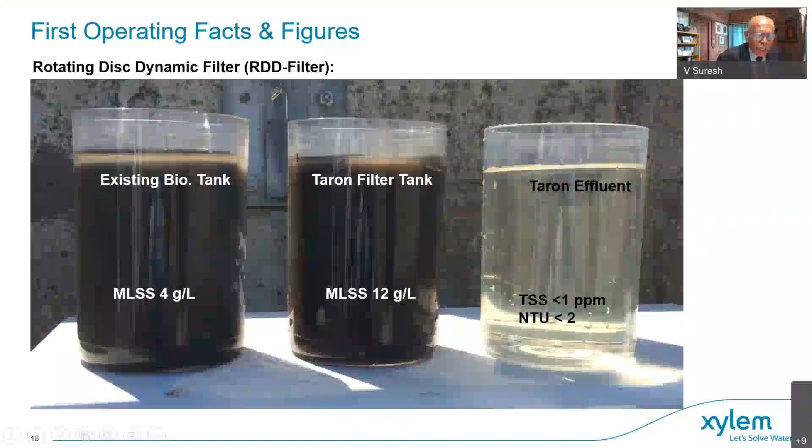Mayor Garg, Head Infrastructure Service of Rudrabhishek Enterprises Limited, is trying to talk about using refuse-derived fuel or biomass pellets for power generation. Could I ask Garg sir to kindly make his interesting presentation on how to use all the waste material as an important fuel, RDF component. Sir, please go ahead.

Yeah, but try to make it in 7 minutes, not more. Sir, yeah, we'll have some time.

Good afternoon to all distinguished panelists and Suresh sir. Let me share my screen. I hope it is visible to everyone. Not so far, it'll come once you open it. It's coming now, opening now. Now it's come, sir. Yeah, sir, very visible, very visible.

I am Mayor Kumar Garg, Head Infrastructure Services. Joined REPL about a month back. On the topic of use of biomass pellets for electricity generation, I am thankful to Professor S.K. Tyagi of the Department of Science and Energy Studies at IIT Delhi, who initiated me into this, and this is how the interest developed.

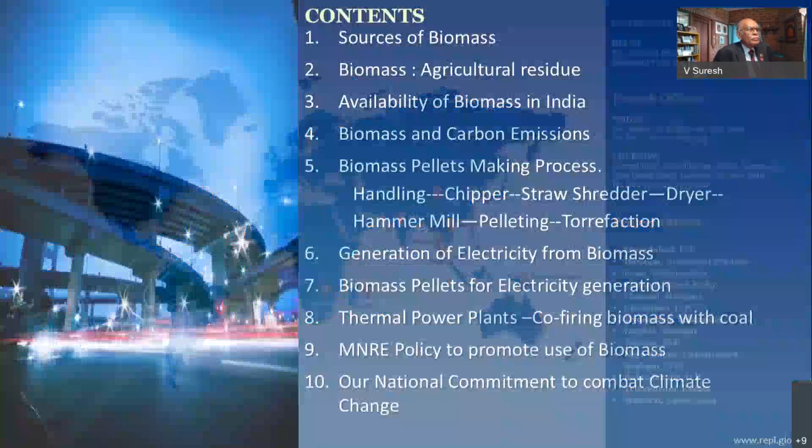Yes, sir. So I'm going to cover the sources. I think I'll straight away start. Yeah, you should better go ahead.

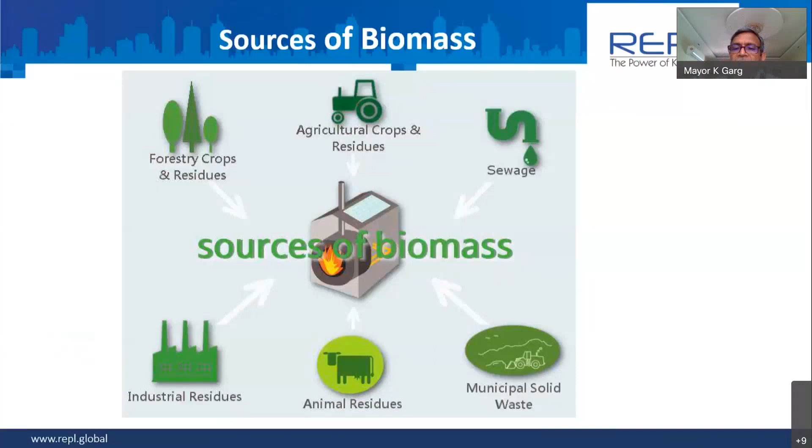We all know that the sources of biomass are forestry crops. We get it from agriculture residue available from the field after harvesting, maybe from sewage treatment plants as dried sludge, from municipal solid waste, from animal residues, and also from various industries. These are some of the agriculture residues generally used for making biomass pellets: wood chips, sawdust, off cuts. You can see all this on the screen.

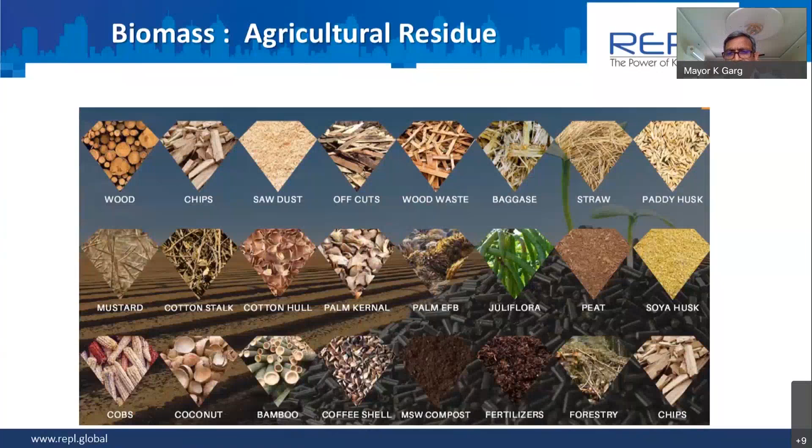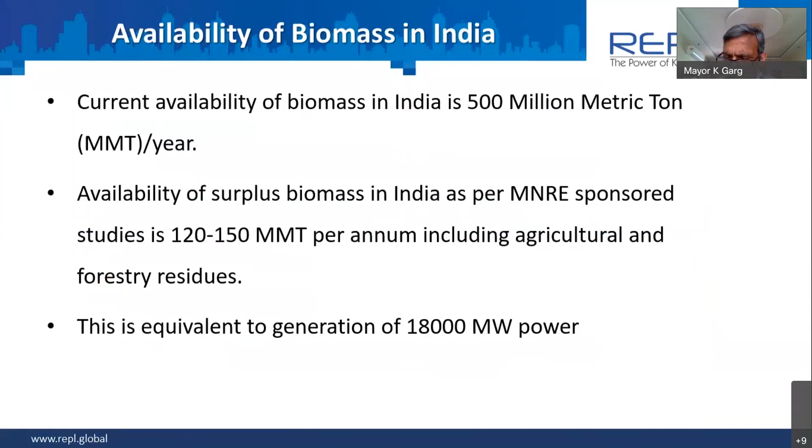Now, the current availability of biomass in India is around 500 million metric tons. As per MNRE studies, it is around 120 to 150 million metric tons per annum, which includes agricultural and forestry residues, equivalent to generation of around 18,000 megawatts of power.

Why is this important? Biomass is generated from plants, from leaves or roots, and when they are alive, they absorb carbon dioxide through photosynthesis. When it is converted into biomass pellets and we burn it, the carbon dioxide goes back into the atmosphere, so in a way it's a carbon neutral fuel. Even after considering the energy used in transportation, collection, processing, and making of the biomass pellet, it is significantly lower than coal firing, which makes it a greener alternative.

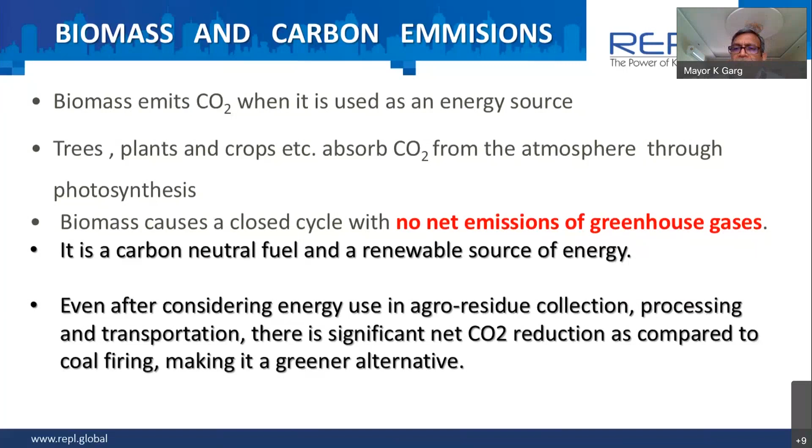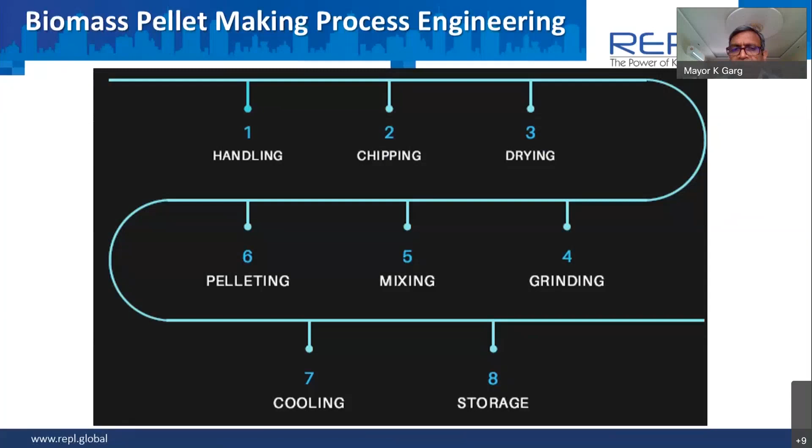This is how we make biomass pellets. First, the biomass raw material is collected and brought to the pellet making mill. Chipping is done, then drying, grinding, mixing, pelleting, cooling, and storage. I'll explain in the further slides.

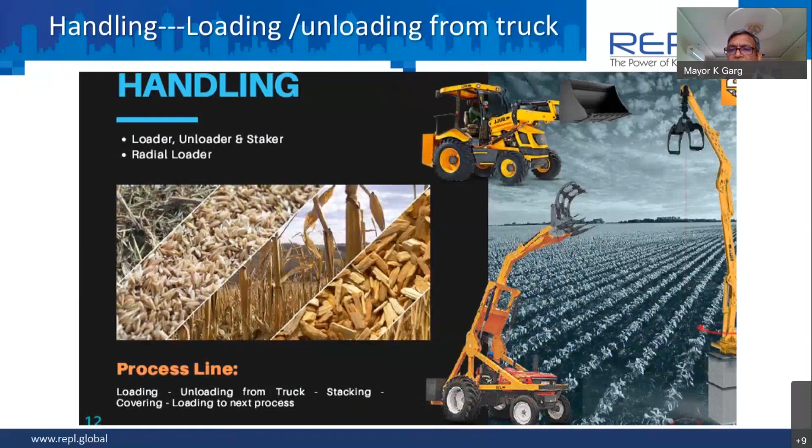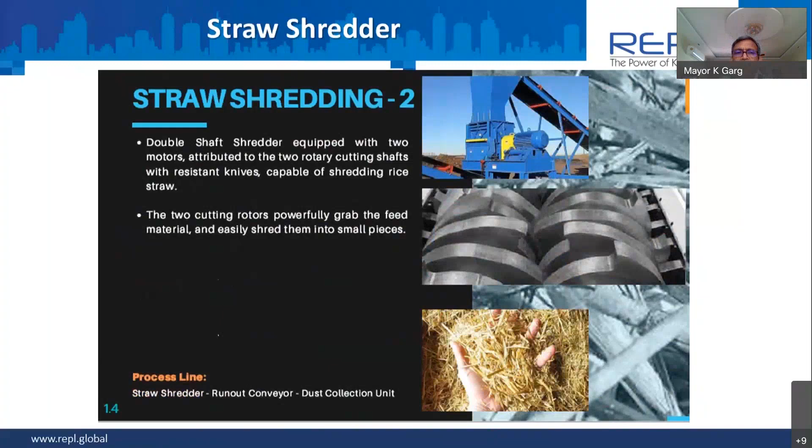Basically you bring the agriculture residue from the fields to the pellet making mill, then you chip it to make it smaller sizes. If straw is there, a particular shredder makes it smaller still. Then the chips are dried, since moisture content shouldn't be more than 10 to 12% — more moisture causes problems in pellet making. Ultimately, you churn everything down to the smallest particle and force it through a die to get the pellets, generally 20 to 35 mm in diameter and similar length.

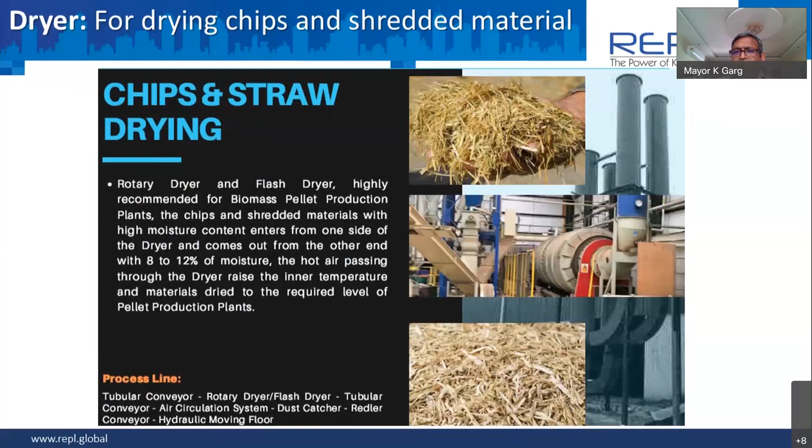This is what you're trying to achieve, which can happen only when the moisture content is less than 10 to 12%. So what you see here at the bottom of the screen, these are the pellets.

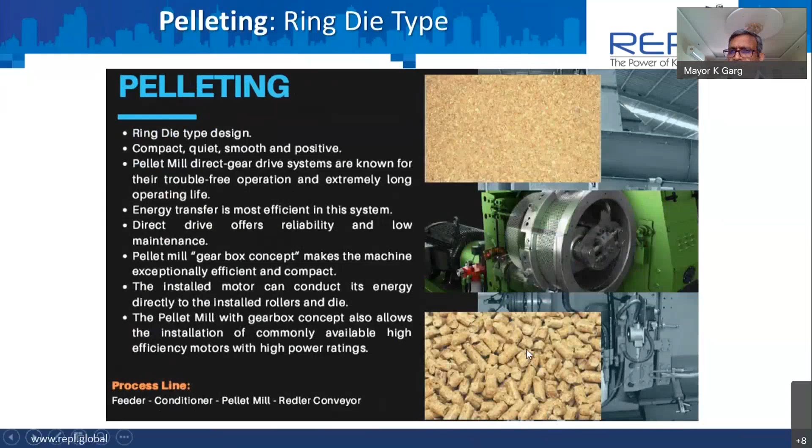And torrefaction, why do we do torrefaction? Torrefaction is nothing but slowly heating biomass pellets to 300 degrees Celsius to improve their energy content and also the finish. What you get in return is a very solid, uniform product, which retains 70% of the total weight. The energy content also comes down, but it is very low in moisture content.

These are generally preferred by NTPC. Lately, NTPC has started co-firing coal along with biomass pellets, to the extent of 5 to 7%, so these biomass pellets need to have a particular quality in terms of percentage fines, raw material used, moisture content, and gross calorific value.

So both torrefied and non-torrefied biomass pellets can be used. All over the country, around 13 NTPC plants have been retrofitted to make use of biomass pellets.

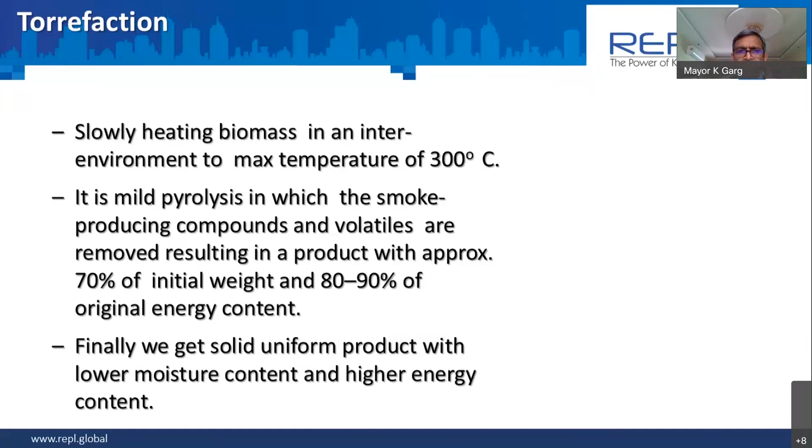This is how the biomass pellets look after torrefaction. You see it becomes black after heating it up to 300 degrees Celsius.

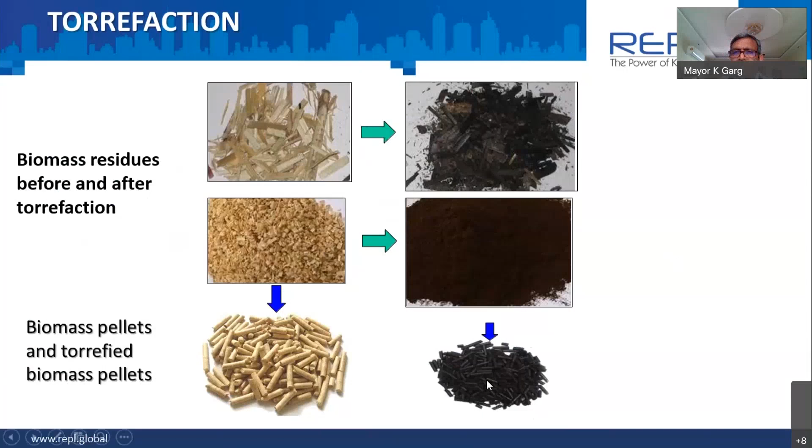And there are various methods of cogeneration using sugar cane, cogeneration of electricity in sugar cane or palm oil industries, or in the pulp and paper industry. This biomass pellet can also be heated, converted into steam, and then used for running steam turbines for generation of electricity.

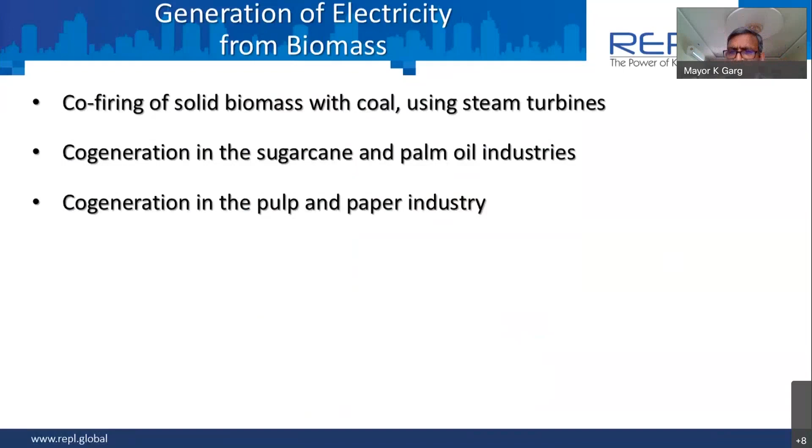So what we are doing is, if you basically burn it to convert it into steam, you are running a steam turbine which has a very small efficiency of 20 to 30%. But if you use thermal gasification, that is, a gas turbine combined cycle power plant or fuel cells, you may increase the overall efficiency up to 40 to 50%, which we call biomass integrated gasification combined cycle

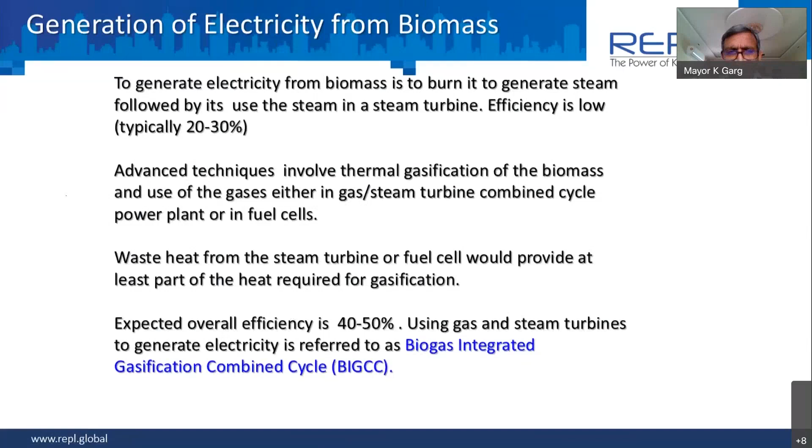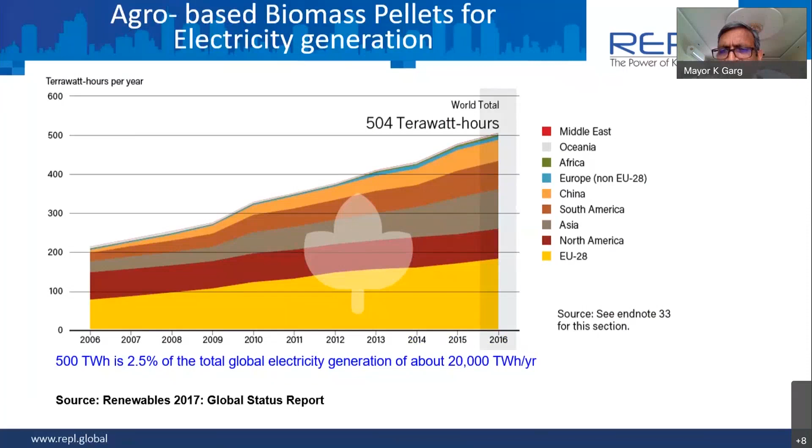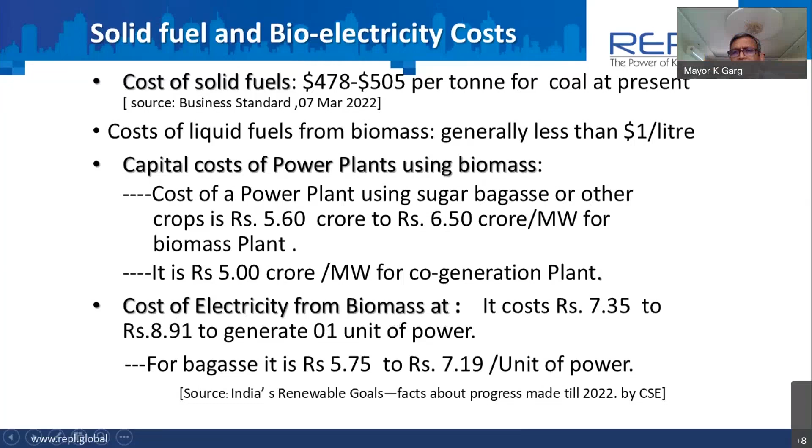NTPC gives a very good rate, around 24 to 25 rupees per kg, which is more than the production cost of the biomass pellet.

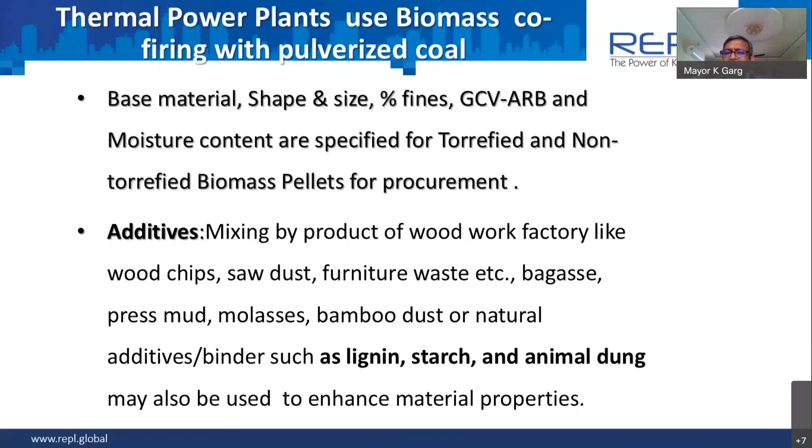We can use additives like lignin, starch, and animal dung during the making of biomass pellets, only to improve the surface quality. As of now, around 5 to 7% of the biomass pellet is used for co-firing in thermal power plants.

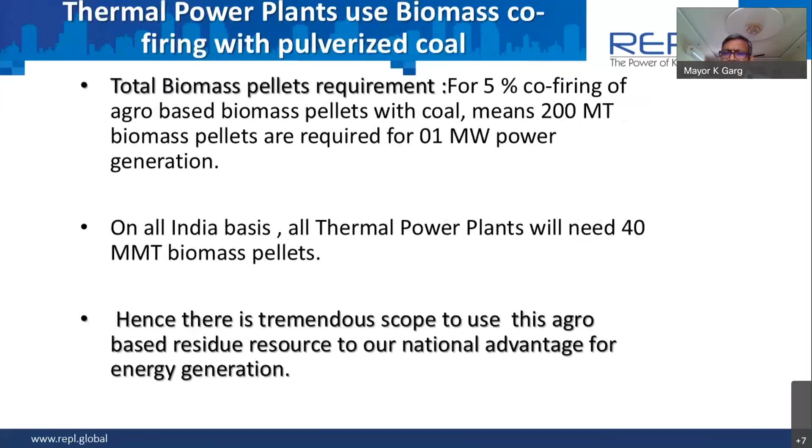All India level, we see the thermal power plants available in India can use around 40 million metric tons of biomass pellets. So there is a great potential to use. Yes, there is tremendous scope to use agro-based residue resource to our national advantage.

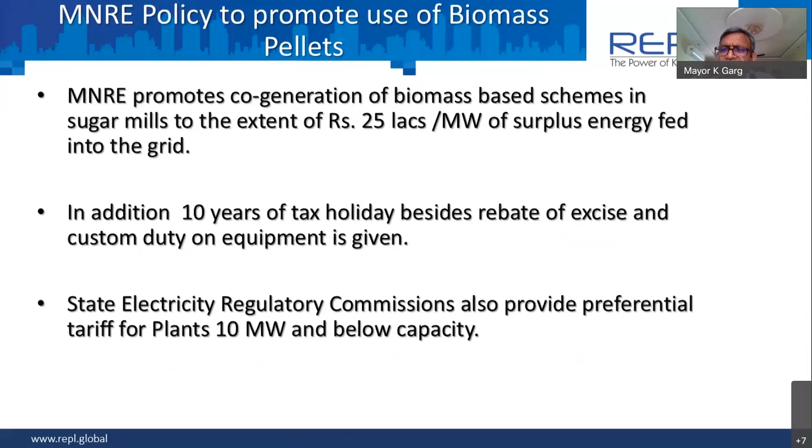MNRE also promotes co-generation of biomass-based schemes in sugar mills to the extent of rupees 25 lakhs per megawatt of surplus energy produced. They also give 10 years of tax holidays, besides rebate on excise and custom duty. And the state SERC also provides preferential tariffs for plants up to 10 megawatt.

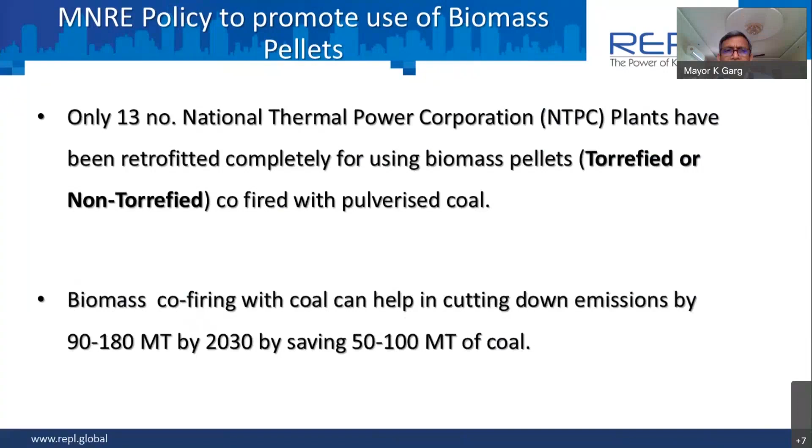One megawatt, yeah. Now coming to this, we are well ahead of national commitment, very close. We have a national commitment to fulfill the promise made at COP26 through our Prime Minister, that we will bring down our energy requirement by 50% through renewable energy sources by 2030.

Yeah, very right, 450 gigawatt of energy, correct. This will include, in addition to solar, other renewables. Okay, yeah, so I think this is a step in the right direction.

If biomass pellets can be used to the maximum possible extent in energy production and as fuel for meeting our fuel requirement, it is also a big boon to the citizens of Delhi and other places where you get air pollution during winter because of parali. Yeah, very right, this is what it is.

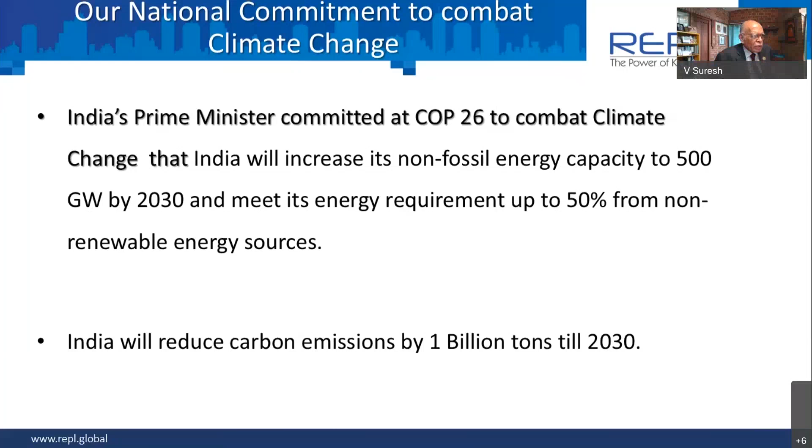It is because of the interest in biomass pellet making that I have been... Yes sir, get this, thank you. I think it's a wonderful initiative.

It was very interesting to see your new initiatives for the pellet, and I'm very happy about the type of figures that you indicated. You can have 1 billion ton of carbon footprint reduction. That was your last line, and I'm very happy to note that.

In terms of the calorific value that the new pellets and this RDF can bring, as against conventional coal or other energy sources - because you said you're mixing it in cement plants, various people are mixing part of it with other source of energy along with fossil fuel or whatever. So first, cost is one area. If you can tell the value, the fuel value, calorific value per ton.

Sir, you'll be surprised to know it gives a very good gross calorific value of around 5,000 kilocalories per kg. Okay, got it. And what NTPC specifies is they accept up to 2,800 kilocalories per kg for non-torrefied and 3,400 kilocalories per kg for torrefied. So very good, it goes beyond 2,800 and 3,400 - you're doing 5,000, am I right?